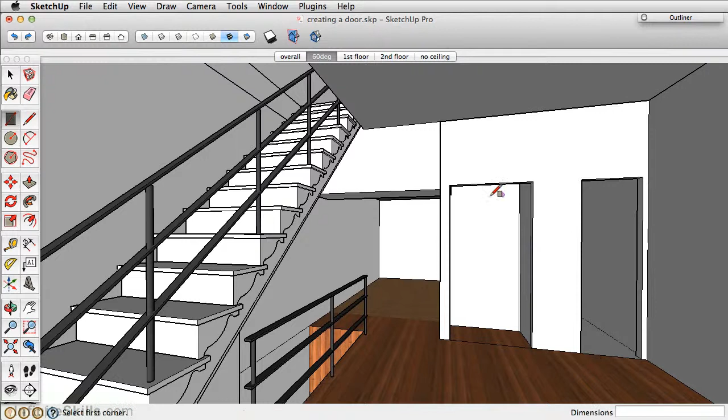Let's get started with creating our generic door. This door here we'll start with is just our closet door, and we want this in a closed position. So go ahead and take the rectangle tool and draw a box around the opening.

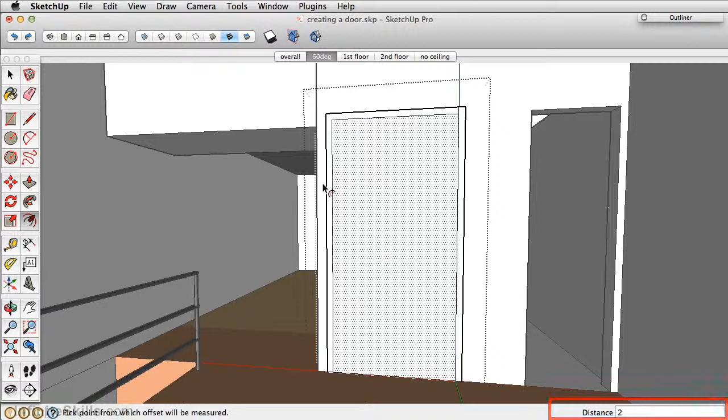Now take the select tool, double click to select the face, right click and make it a group, double click to enter that group, and now we want to offset the face 2 inches. However, if we hide the rest of the model, you'll notice it offsets all 4 edges. Let's take the move tool and move this bottom edge up in the blue axes so that we only have 3 of the edges that return here. I'll unhide the rest of the model and now push pull this out just a 1/2 inch.

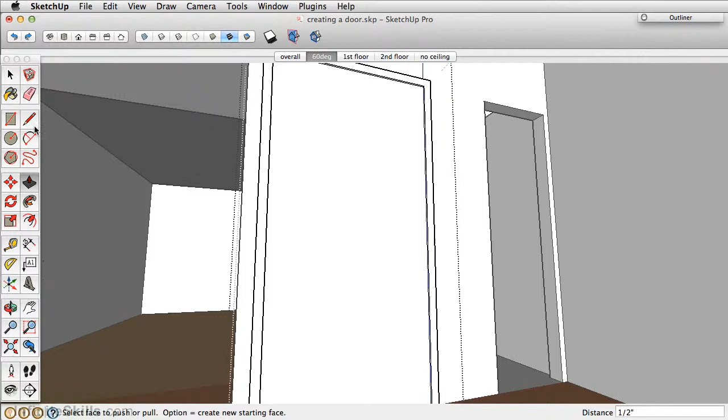Just to add a little bit of detail, take the line tool, find the midpoint, and just draw a line straight down. That's all the level of detail that I want for these doors. I don't want them to be highly drawn or rendered. I'll show you later ways in which you can grab components from the 3D warehouse that have more detailed doors.

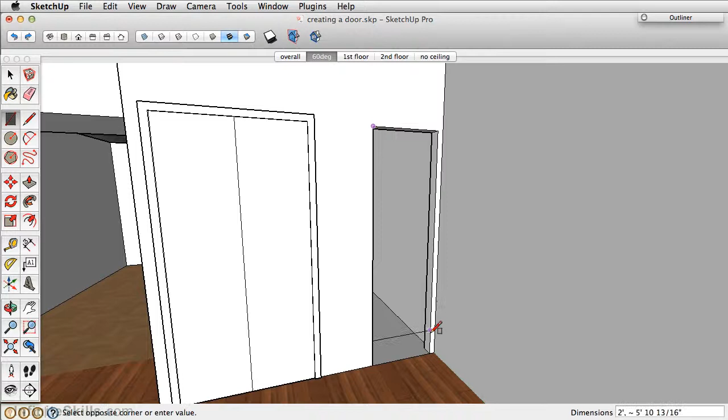For the bathroom door here, let's take the rectangle, similar process. We'll draw our rectangle, make our group, offset 2 inches, hide the model, move the bottom edge up, push pull out a 1/2 inch.

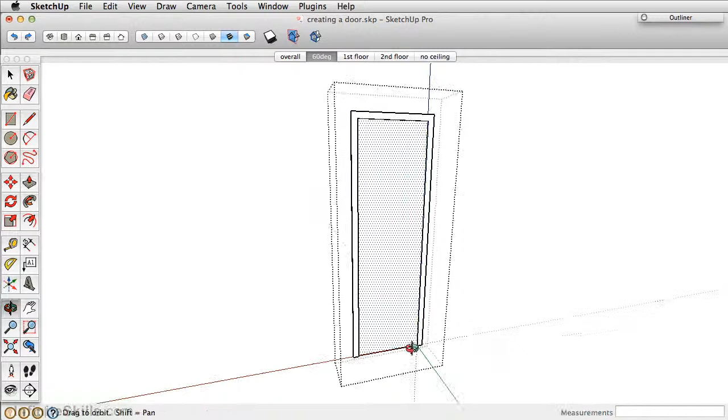In this case, however, I want to show the door open. Right now it's just a single face and it's connected to the trim. Take the select tool, double click the face, make it a group, and now use the rotate tool and rotate from the blue axes on that bottom edge and rotate this out 90 degrees.

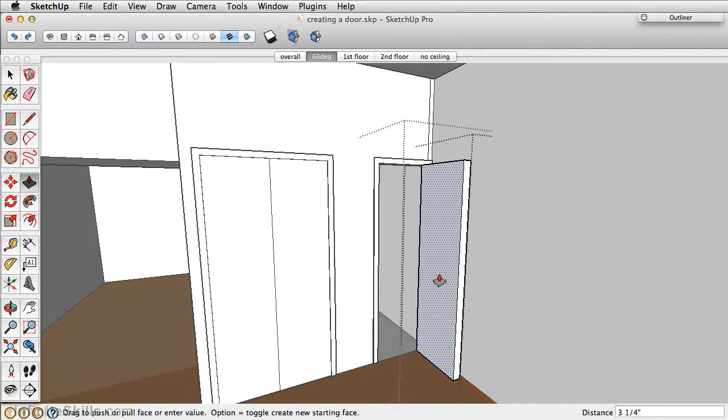Unhide the rest of the model. Double click on our group and let's push pull this 2 inches. So now we have our door open. We can take the select tool and just click outside of the model.

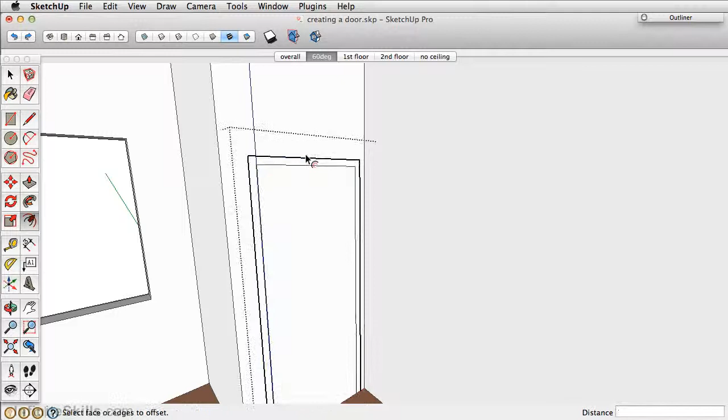Last door that we want to do here is just this door here. So again, rectangle, group, offset, hide rest of model, move that edge up, push pull 1/2 inch, group, rotate this out 90 degrees. Double click to enter and push pull 2 inches.

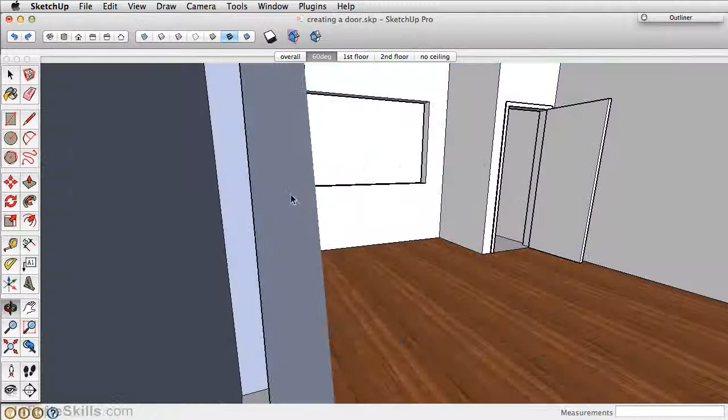So that's really the basics of creating the doors. Now, if this is a repeated door, you could certainly right click on this and make it a component and then just position it in place in other areas that it's used. But for right now, this is pretty simple, pretty straightforward for what we need. And we'll move forward with creating simple window frames.